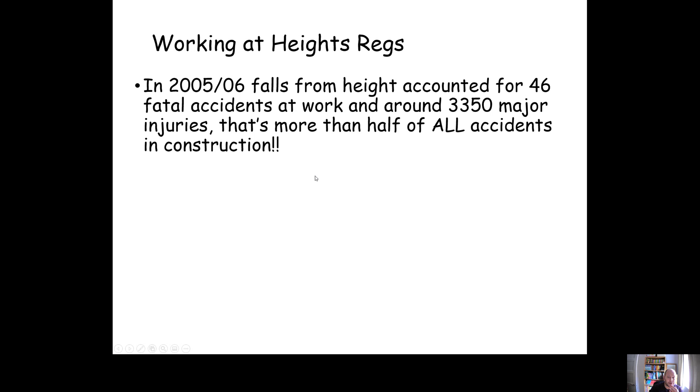Essentially, if you remember back to our risk assessment video, we should always start with elimination. If you can avoid working at height by doing the job another way, then do that. Always start with elimination in your risk assessment protocols. It specifically states in the working at height regs that we should avoid working at height where we can. So if you can do the work from ground level, then do it from ground level.

If you have to work at height, make sure you use appropriate equipment to stop you falling. These could be guardrails, these could be harnesses. It could even possibly be doing the job from a cherry picker rather than from a ladder or from a scaffold if it's more appropriate. There's lots of different options and lots of different things you should consider before you work at height.

As well as having things to prevent you falling, the guardrails, etc., also set harnesses, airbags, nets, there to catch you in case you fell. And use appropriate signage to prevent people walking onto things that might be fragile, might create a falling hazard.

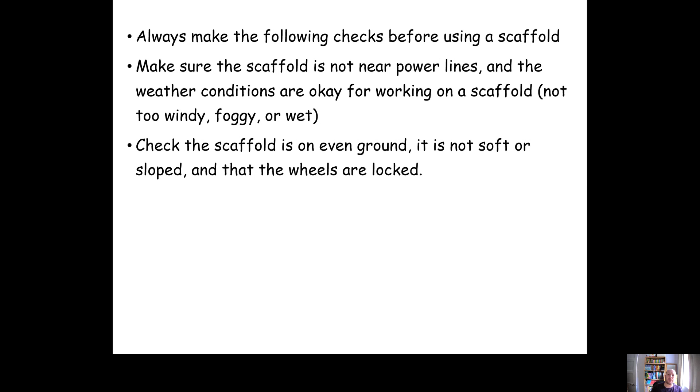Check it's on even ground. Like I've said, these things have got wheels on them. If it was sloped, the scaffold could start to run off down the hill whilst you're on it, which is obviously going to be less than ideal. If the ground's soft, you could have one or more of the legs going into the ground, and it potentially tipping over and you falling off again. Not something which would be good for yourself.

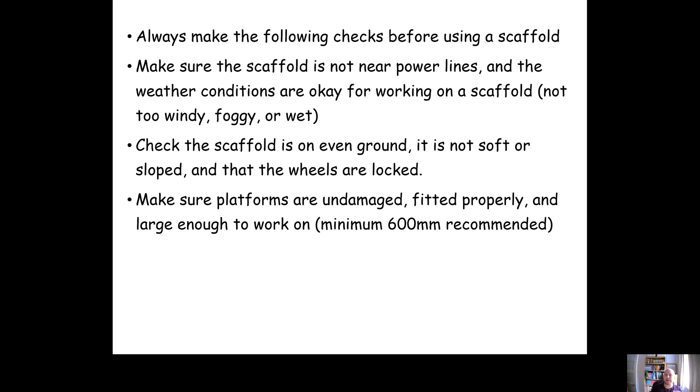Check the platforms, check the whole thing's in good condition. Essentially, you just have a look at the bars, have a look at the platforms, check the platforms aren't warped, aren't damaged, the bars aren't damaged. Just generally check the condition before you climb onto it. Make sure you've also got enough space to work. It's recommended a minimum of 600mm working space on a scaffold.

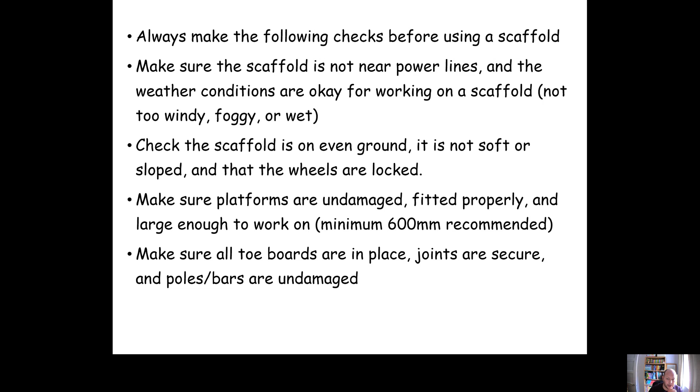And check the handrail is the correct height. City and Guilds have asked this recently in their test, so the handrail should be set between 950mm and 1150mm, with the intermediate rail, which is the rail in between the handrail and the floor, roughly about 450mm apart.

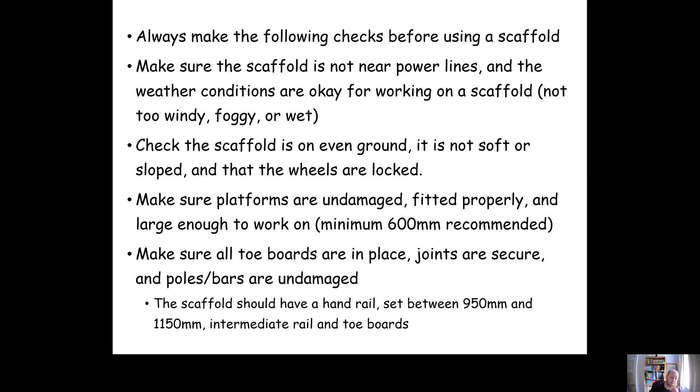If you move a mobile tower scaffold, make sure that you clear everything off it first. If you start pushing it and there's tools and stuff on there, there's a real chance they might then fall and hit you as you're pushing it, which is not going to be fun.

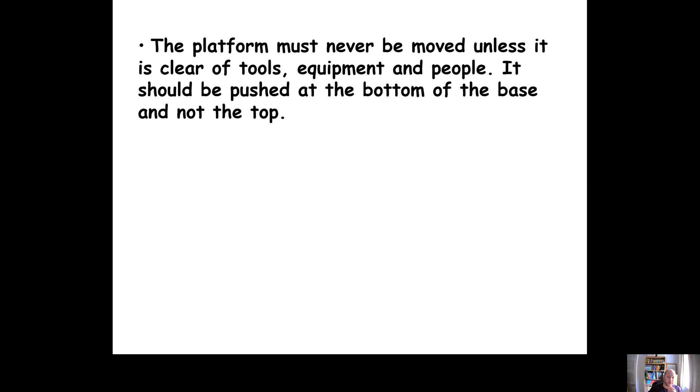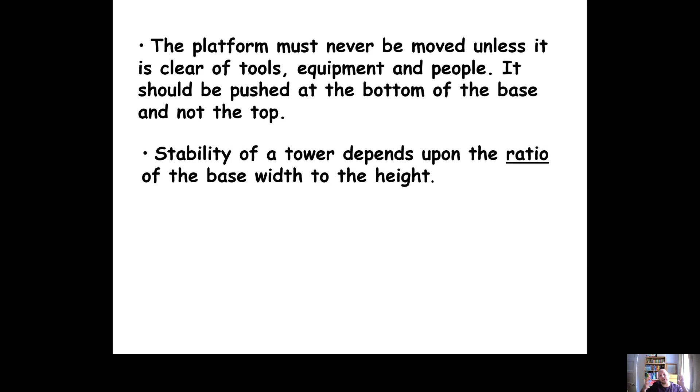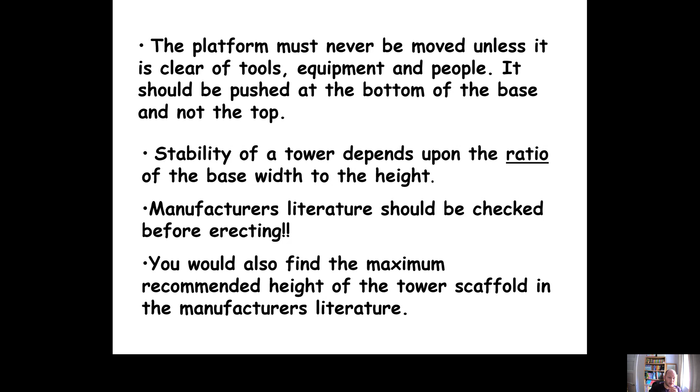The stability of the tower depends on the ratio of the base to the height. The taller something is, the more unstable it becomes unless you increase the size of the base at the same ratio. And one of the ways you can do that is through outriggers, which we're going to look at pretty soon. But you should always check the manufacturer's information before you build a scaffold. And you'd find the maximum height in the manufacturer's literature.

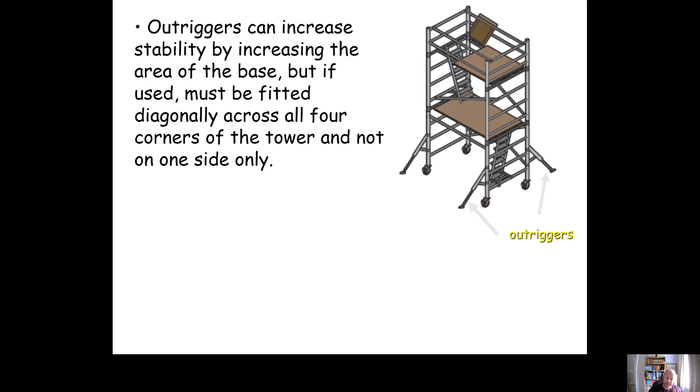Okay. Outriggers are these things here, and they increase the base area essentially and allow you to build that a little bit higher. But as I've said, always make sure you read the manufacturer's literature before you put it together. Okay. Worth noting, if you do use outriggers, make sure they're clearly marked, put hazard warning tape on them so people aren't going to trip over them.

And the ladders, access in a mobile scaffold should always be done on the inside. Because they're quite light scaffolds, if a person climbs up the outside, especially if they're carrying tools and equipment, there's a real chance they could actually pull the thing over, it could tip over, land on top of them, land on top of other people.

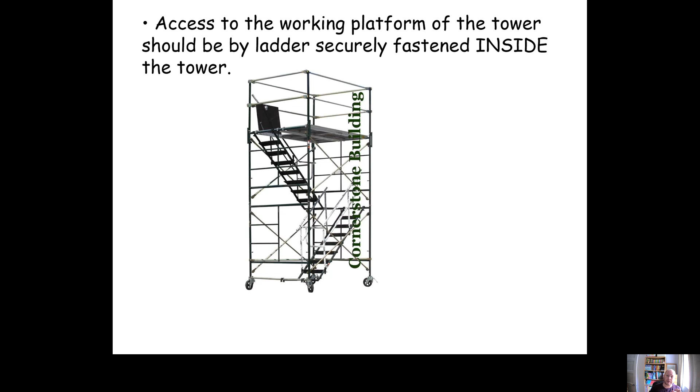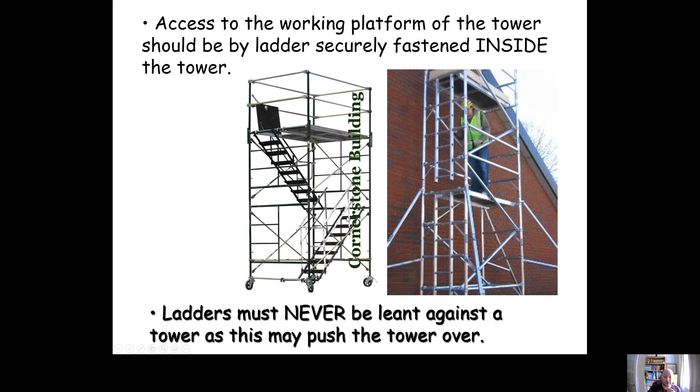So whenever you access a scaffold, always access it through the middle. Even if you see a ladder on the scaffold, you should always go inside the scaffold and climb up the ladder on the inside. Okay, like you can see just here. Yeah, don't lean the ladder against the tower scaffold because it might push it over.

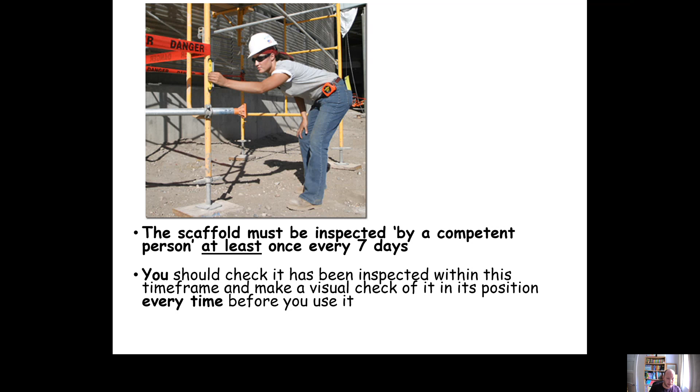Okay. As I've said, scaffold should be inspected by a competent person at least every 7 days, and on it there would be some what we call scaff tags. Look a bit like this, a wee green tag with a date on it of when it was last inspected and when it's to be inspected again.

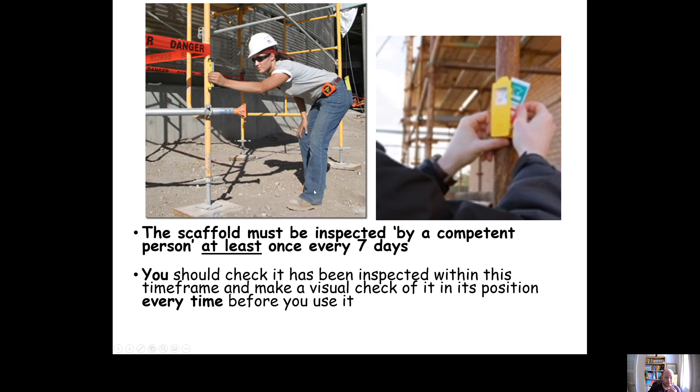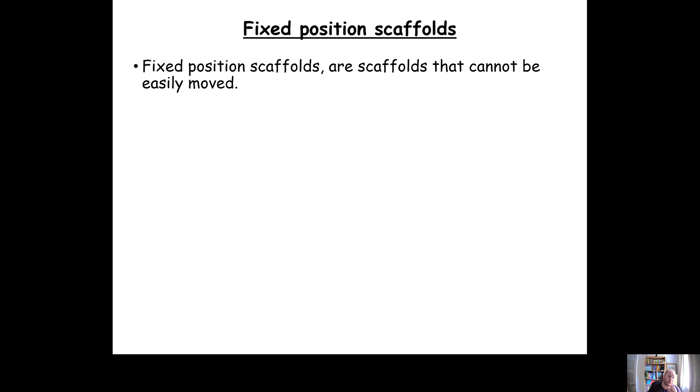Alrighty, so fixed position scaffolds, a lot of the same information applies really for fixed position scaffolds. Fixed position scaffolds are scaffolds which can't easily be moved. You'd need a professional scaffolder really to move them. And again, you should always visually inspect them before use. A lot of the same things that apply to the mobile scaffold also apply to the fixed position scaffold.

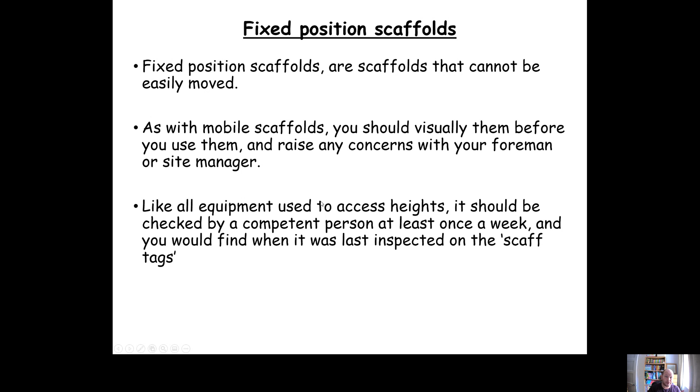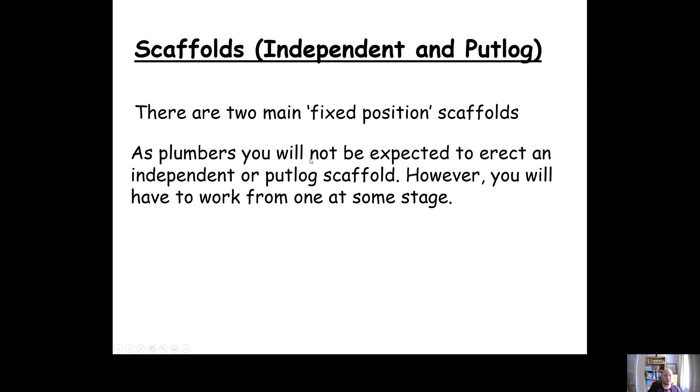So yeah, the fixed position, like the mobile, should be checked in its current position at least once every 7 days. It should have scaff tags. There's two different types of fixed position scaffolds that we need to know about. These are an independent scaffold and a putlog scaffold. A putlog scaffold essentially has a putlog which is fixed into the wall.

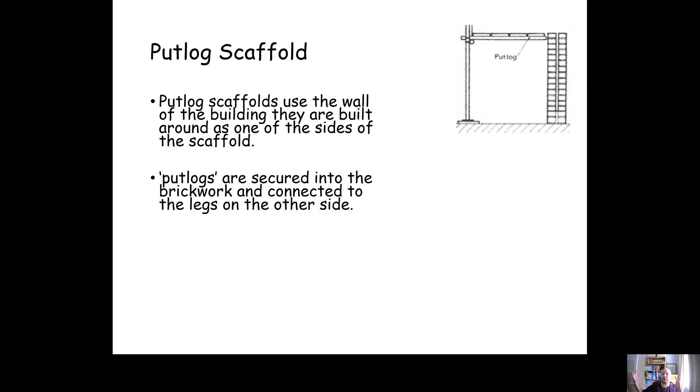Okay. A putlog scaffold could have a minimum of 2 rising bars with putlogs fixed into the walls. Essentially, the wall acts as the support for the other side of the scaffold, whereas an independent scaffold would have to have at least 4 legs and it could stand independently of the wall. Essentially, with an independent scaffold, you could build before you start building the wall, whereas a putlog scaffold, you have to have the wall already in place before you can install that type.

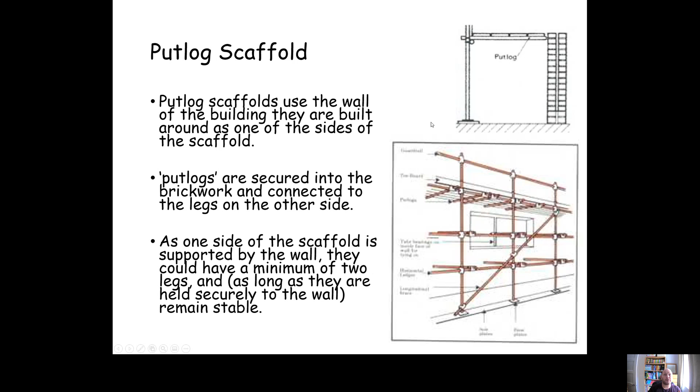So as you can see, the putlog's driven into the wall, and the wall acts as one side of the support of the scaffold. Whereas an independent scaffold, you can see, stands completely independently on 4 or more legs. Okay.

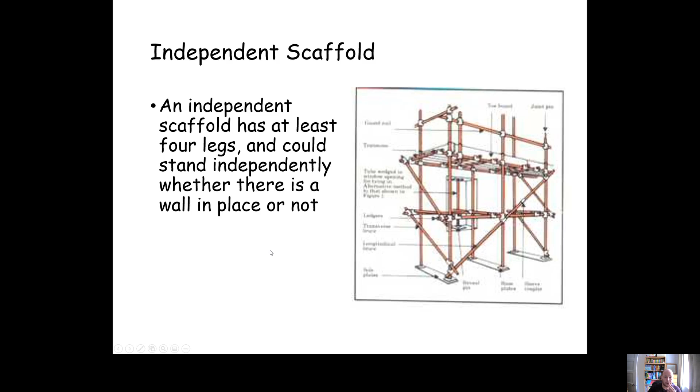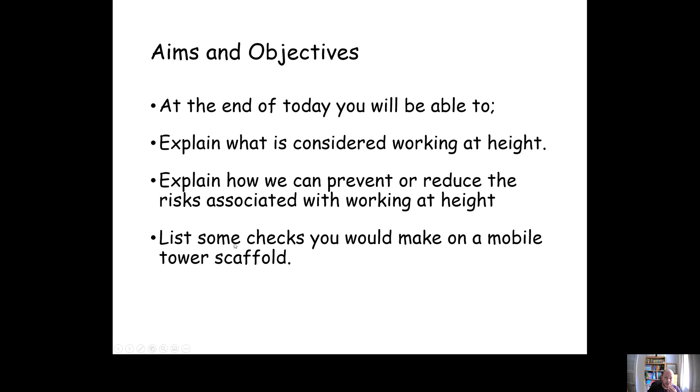So the aims of this session, which you guys hopefully should have been able to do now and you'll be tested on, are to be able to explain what is considered working at height, explain how we can prevent or reduce the risks associated with working at height, and list some checks you would make on a mobile tower scaffold and also an independent scaffold as well.